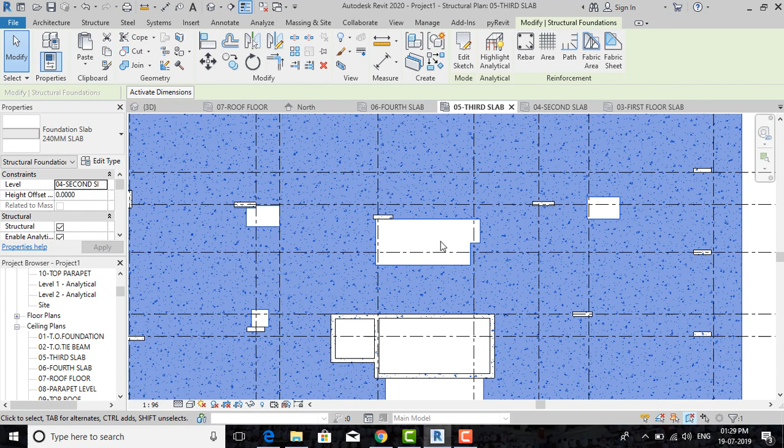You can see I did not indicate it, or if I go to structure, if there is a shaft opening, if I put here, it will show me the cutouts. However, we will show that in the next video.

So we have some columns here. You can see if I scroll down.

If I go to the annotate tab, you can see there is a dimension tab here. In this we have align tool, linear, angular. We have some different tools that are radial, diametric, and arc. We have some elevational tools.

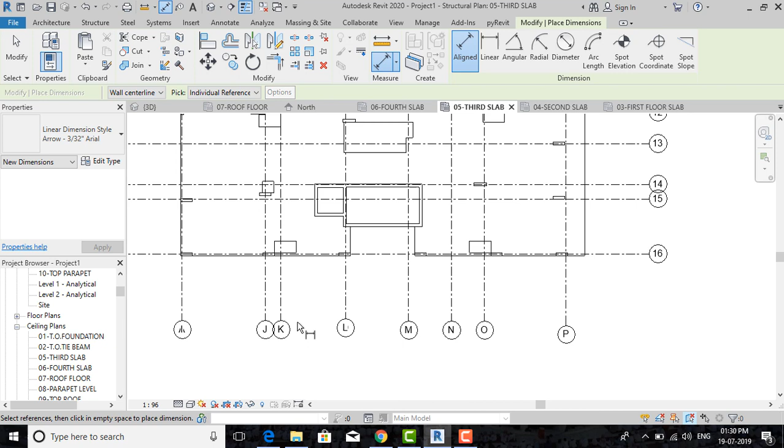The first important tool in this tab is align tool, which is very important. How to measure? If I click on this one grid, then the second grid, you can click here, so it will show you the dimension, which is 500 meter.

You can continue this like this, but if you have to do it very fast, just click here, click on the second grid, second, third, fourth, like this. You can just continue the grids, and last you can click on the outside. You can see you got the dimensions, which is continuous dimensions.

We'll delete this. If you want to continue this dimension, no need to again go to align and do this. If you click on the dimension, there is an option here, edit witness lines. If I click on this, you can just continue and drop here. If I click on this, you can see this is one continuous dimension, which is a good thing.

You can move this, it is locked. If you unlock this, you can move it also. So this is the use of aligned dimension.

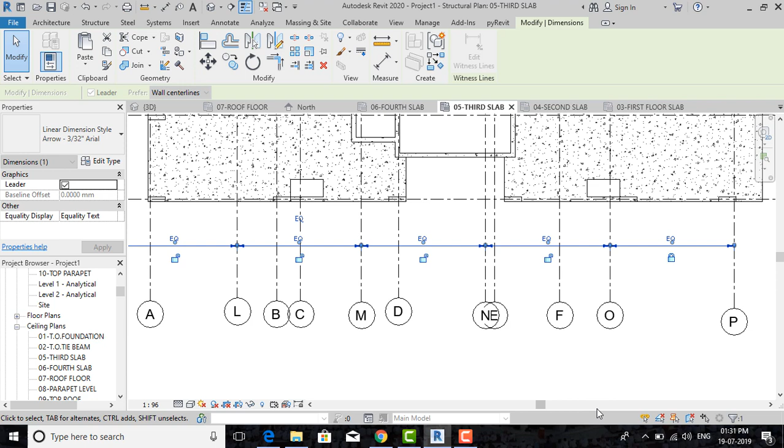One more thing is, if I click on this, there is an option called EQ. If I click on this EQ button, you can see if I remove, it shows that constraints are not satisfied. Since our dimensions are locked, it will not move. If I click on remove constraints, you can see all our locks are removed, and all dimensions are placed, all grids are placed equally.

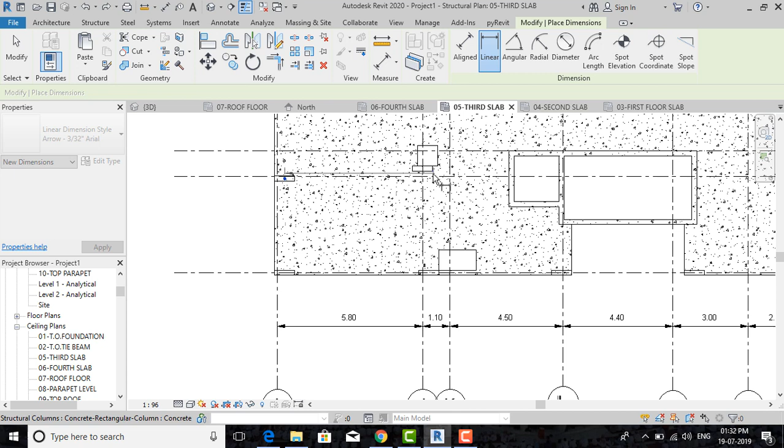So if I press Control Z again, now we'll go to linear tool. This is just to measure our correct length, one point to another point, same as before. The use of align tool is you can measure any angle.

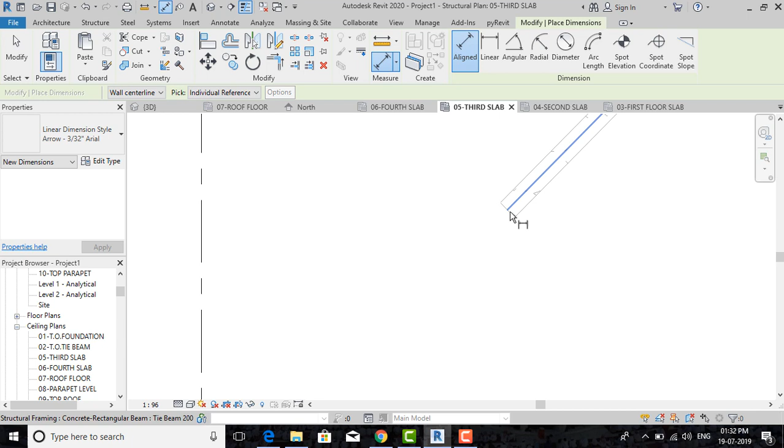I don't have any angled wall here, so if I go to structure and draw one beam like this, maybe my beam will not show. If I go to annotate tab, if I go to align, you can see you can measure, but maybe it is not taking the face here.

So I will draw structure, go to wall, and draw one wall aligned. If I go to annotate tab, align, you can see I can measure with the face.

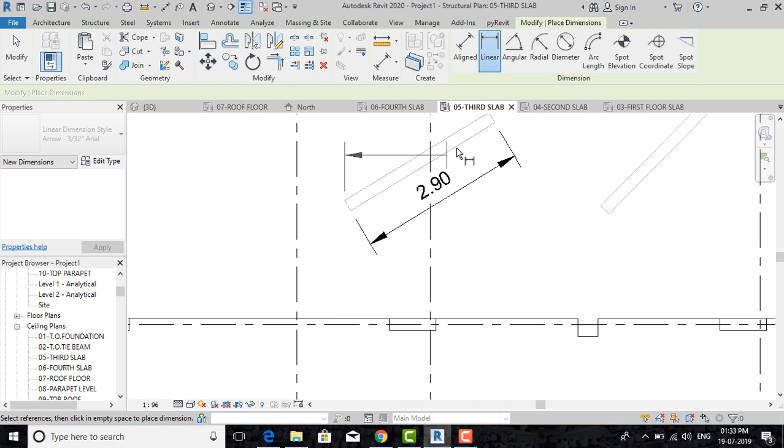But with the help of linear tool, you can't measure angled dimensions, you can only measure the straight dimensions. So angular dimension also.

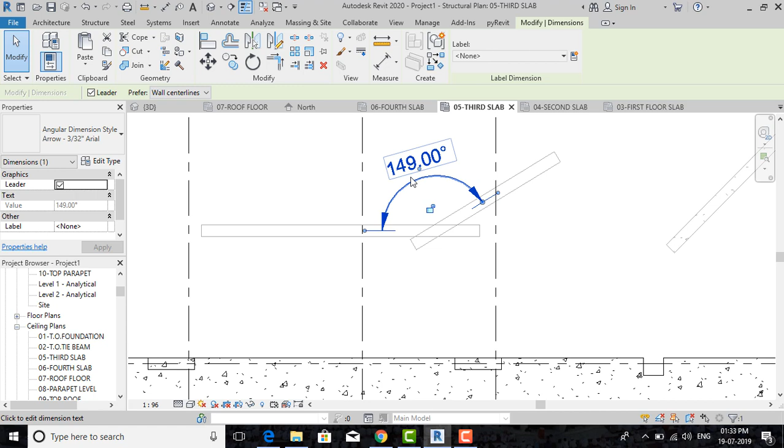If I go to structure, if I go to wall, I will draw one more wall here. If I go to annotate tab again, here I go to angular. You can see I can measure angular dimension here, the angle between two walls.

This is the radial dimension. If I have a circular arc wall, or an arc wall, I will go to annotate, go to radial, and you can see I can measure this radius.

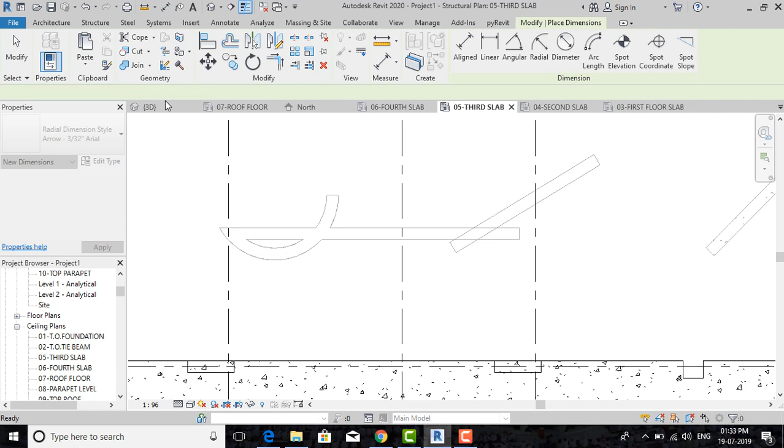And the second thing is I can measure diameter. This is the diameter tool. If I go to arc, I can measure inside, or sorry...

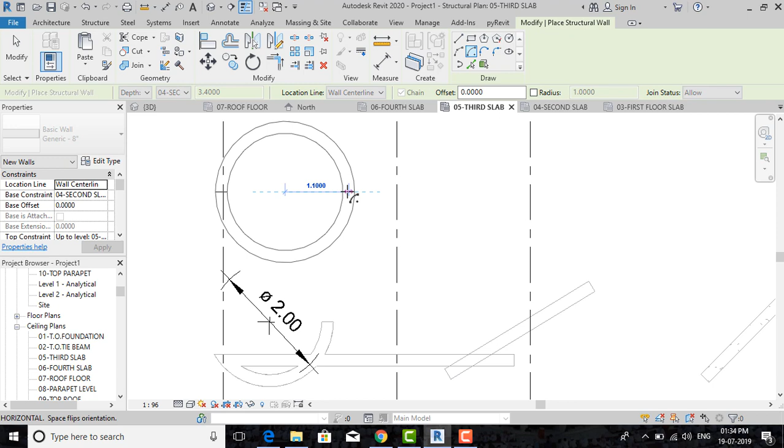I don't know why it is not here, because the arc is cut here. Maybe if I go to wall, I will take this and draw one arc. You can go to annotate tab and just measure. I don't know why it is not showing arc length. Maybe it will show only for the line.

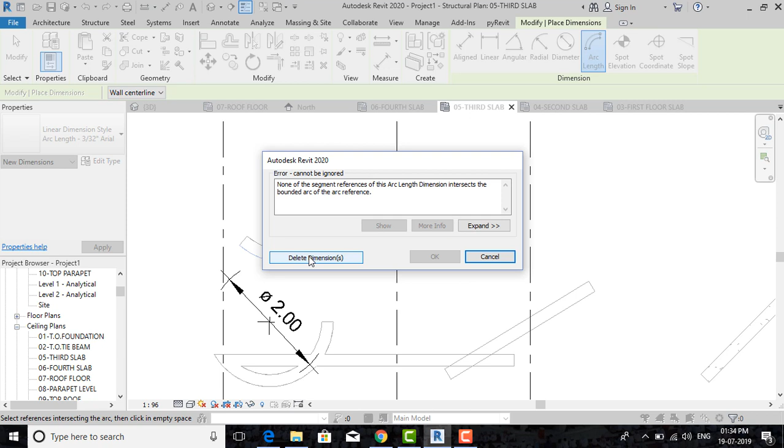If you go here, it places a dimension that measures the length of a wall or other element. I don't know why it is not showing. If I go to arc length, wall faces, or center line, I don't know why it is not coming.

Let it be, I will show it in the next tutorial. If I go to spot dimension, you can see I can give any spot elevation.

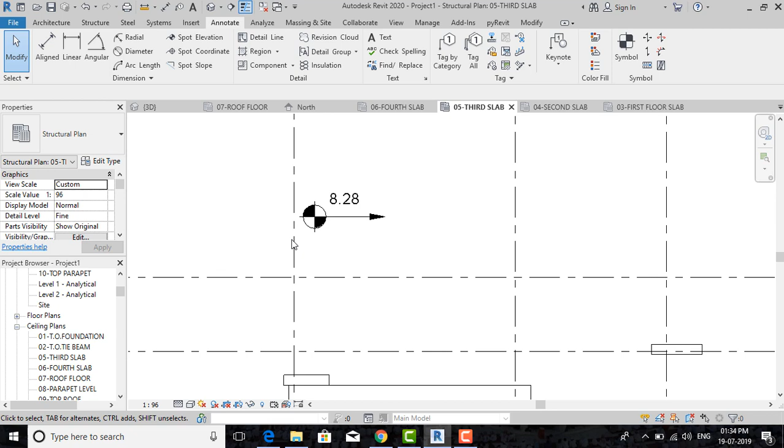Just you can move and copy this like this, it's very easy. And if I want to go and put here, it will not show. You have to go and again put on this edge so that it will show you like that.

What is the elevation? It will show you the spot elevation. Now we don't have any spot coordinate. We have to put these coordinates.

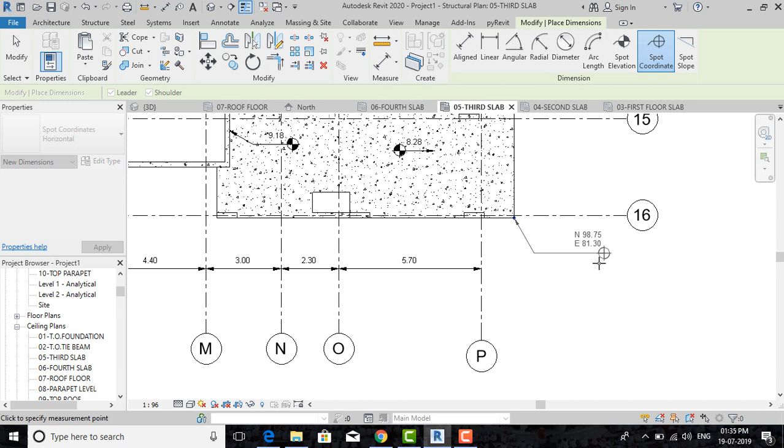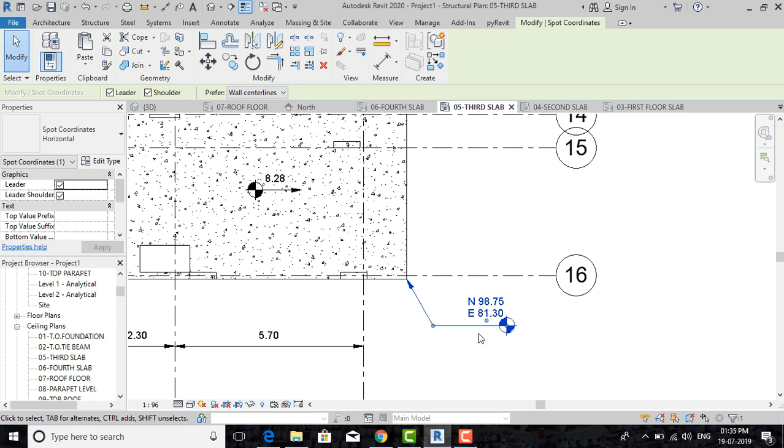There is no use of this in the structural plan for this building. So no use. But if you put your project north and project base point in the correct position, you can get this point and your project location also. On that basis, you can put spot coordinate, which is very important in the architectural plan, not in the structure plan.

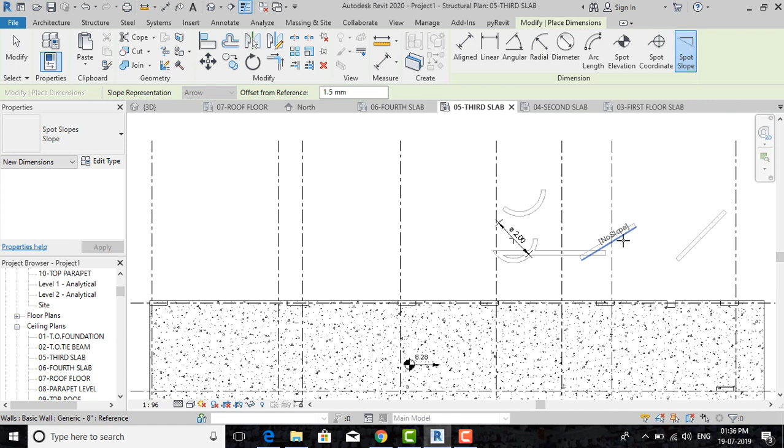We don't have any spot slope because it will show you that there is no slope here. If there is a slope, it will show you, but obviously there is no slope anywhere. If I click on this, it will just show you there is no slope. If there is a slope, it will show you.

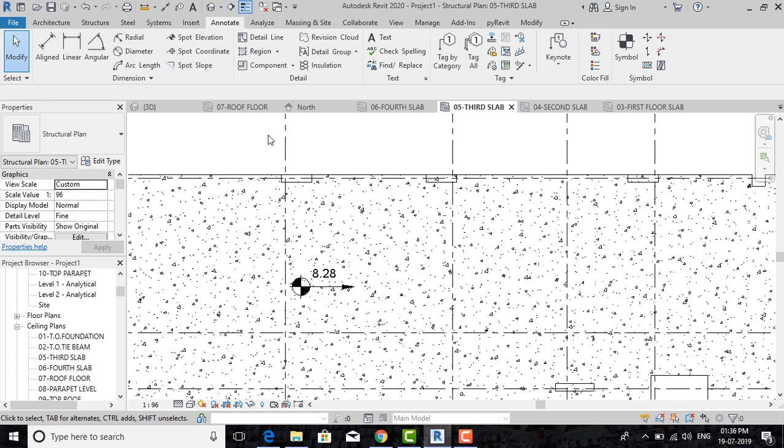So these are the uses of the dimension tab in the annotate ribbon. Hope you guys learned something.

In the next tutorial we will learn about how to annotate the beams. I will also show you how to annotate columns and other things.